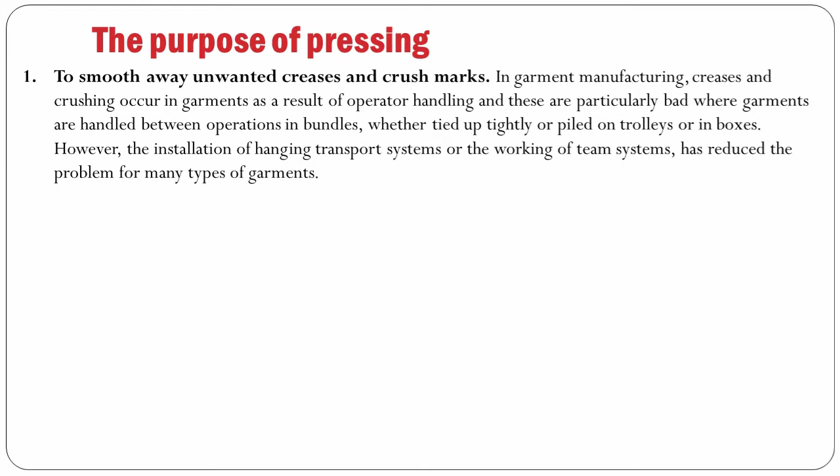The purpose of pressing: to smooth away unwanted creases and crush marks. In garment manufacturing, creases and crushing occur in garments as a result of operator handling, and these are particularly bad where garments are handled between operations in bundles, whether tied up tightly or piled on trolleys or in boxes. However, the installation of hanging transport systems or the working of team systems has reduced the problem for many types of garments.

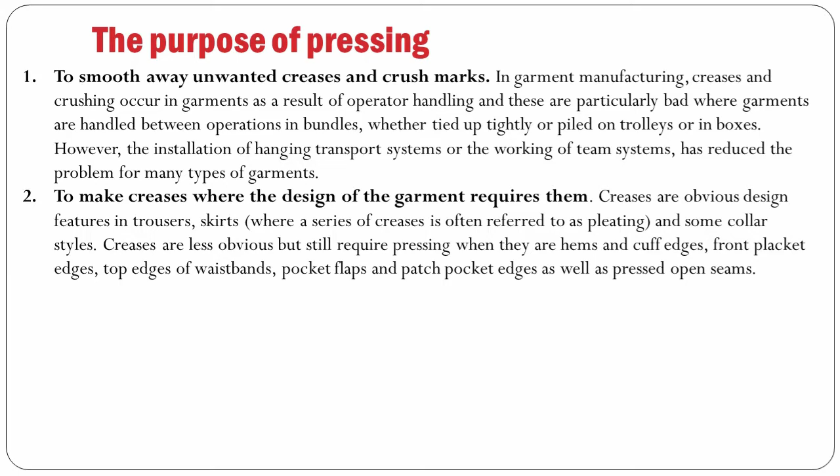To make creases where the design of the garment requires them. Creases are obvious design features in trousers, skirts, where a series of creases is often referred to as pleating, and some collar styles. Creases are less obvious but still require pressing when they are hems and cuff edges, front placket edges, top edges of waistband, pocket flaps, and patch pocket edges, as well as pressed open seams.

To mold the garment to the contour of the body. It is mainly effected in wool or wool-rich fabrics in the types of garment referred to as tailored. This sort of molding involves two kinds of deformation, together or separate, shrinking and stretching. After molding, it is not possible to unpick the seams and return garment parts to their former flat state.

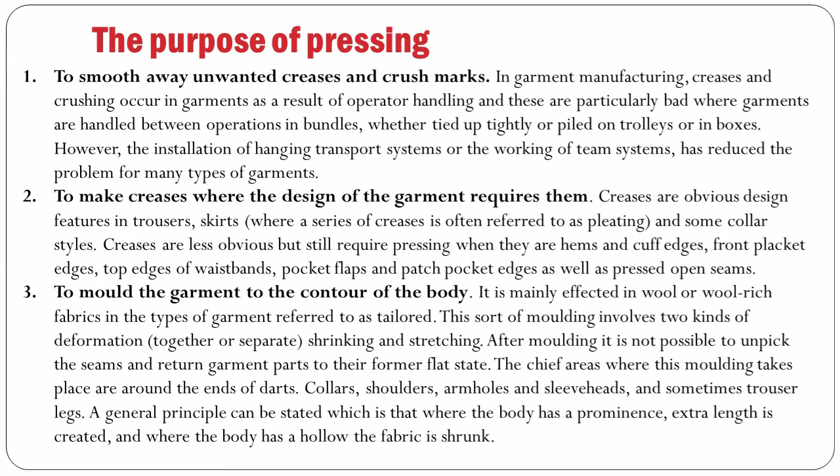The chief areas where the molding takes place are around the ends of darts, collars, shoulders, armholes, and sleeve heads, and sometimes trouser legs. A general principle can be stated, which is that where the body has a prominence, extra length is created, and where the body has a hollow, the fabric is shrunk.

To prepare garments for further sewing, the term underpressing is reserved for pressing operations on partly constructed garments, while top pressing or final pressing is used for completed garments. The stages at which a garment is underpressed will depend on many factors. It normally takes place when several sewing stages have been completed.

An obvious example would be a jacket and its lining before assembly, after which pressing of the separate sections would no longer be possible. Underpressing also makes further sewing easier to do. It may be possible to top stitch a collar which has not been pressed, but it is likely to be more quickly and accurately sewn if it is pressed.

To refinish the fabric after manufacturing the garment. Especially during underpressing, the surface of the fabric may be temporarily changed. A common symptom is gloss or glazing, induced by extreme pressure of press or iron in order to achieve a firm edge or seam. The surface fibers are heavily flattened in such a way as to form a partial mirror.

A related but lesser symptom is generalized flattening of the nap of the fabric, which no longer shows the richness intended by its designer. In summary, pressing makes the final presentation of the garment ready for sale.

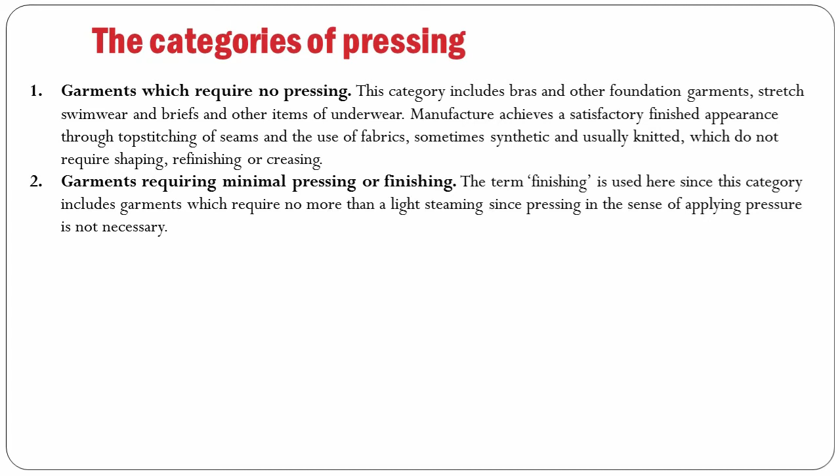Garments requiring the use of an iron in underpressing and final pressing, for the opening of seams and the creasing of edges, and for pressing garments with gathers and fullness, and in situations where style change is frequent. Pressing with an iron is common because it is simple and flexible.

Garments requiring extensive underpressing and final pressing. This category includes garments which require the pressing open of seams and the setting of edges during manufacture, which are often of more moldable fabrics, which use large areas of interlining and which are usually wholly or partly lined.

It includes men's jackets, trousers, and waistcoats, women's tailored jackets, top coats, trench coats, etc. Style change in many of these garments is infrequent and a range of specialized shape press equipment is used. Garments requiring pleating or permanent press finishing.

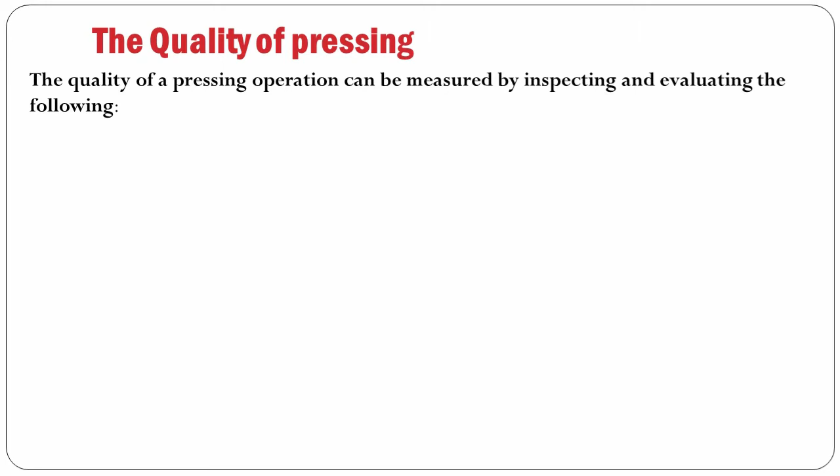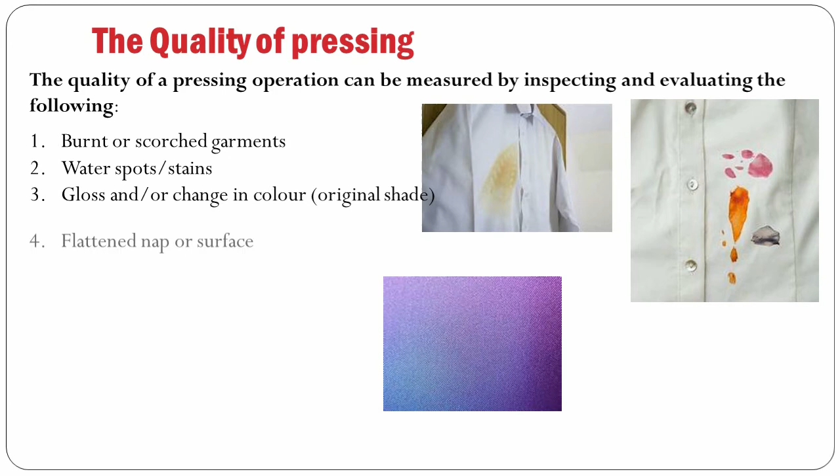The quality of pressing. The quality of a pressing operation can be measured by inspecting and evaluating the following: burnt or scorched garments, water spots or stains, gloss and or change in color from original shade, flattened nap or surface, broken zippers, buttons, etc.

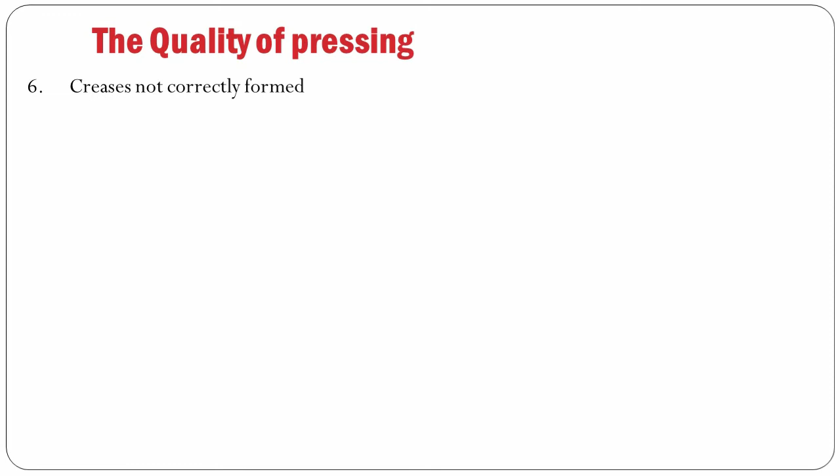Creases not correctly formed, fabric of finished garment not smooth, wrinkle free and showing its proper appearance, edges wavy and stretched or thick, garments not thoroughly dried, pockets not smooth, lining showing pleats, creases, shine, garments not correctly molded either in detail or total silhouette, shrinkage due to heat and moisture.

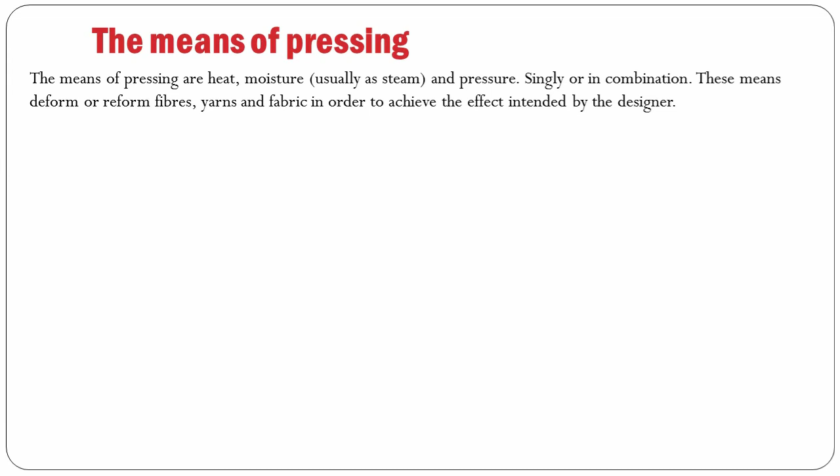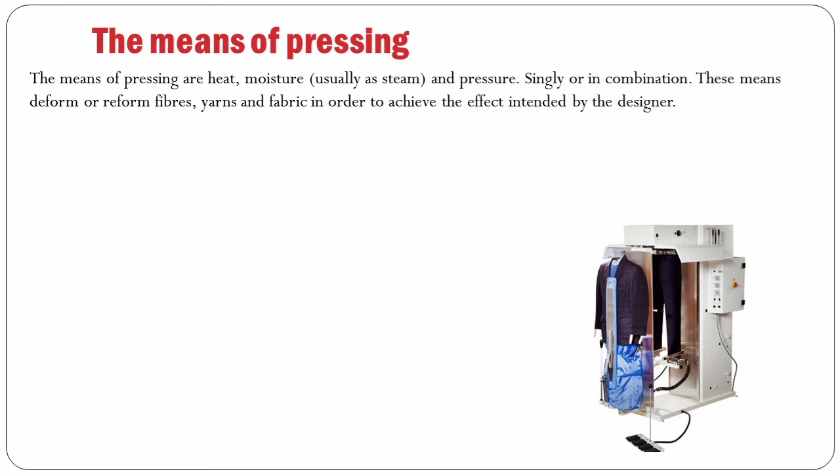The means of pressing. The means of pressing are heat, moisture, usually as steam, and pressure, singly or in combination. These means deform or reform fibers, yarns and fabric in order to achieve the effect intended by the designer.

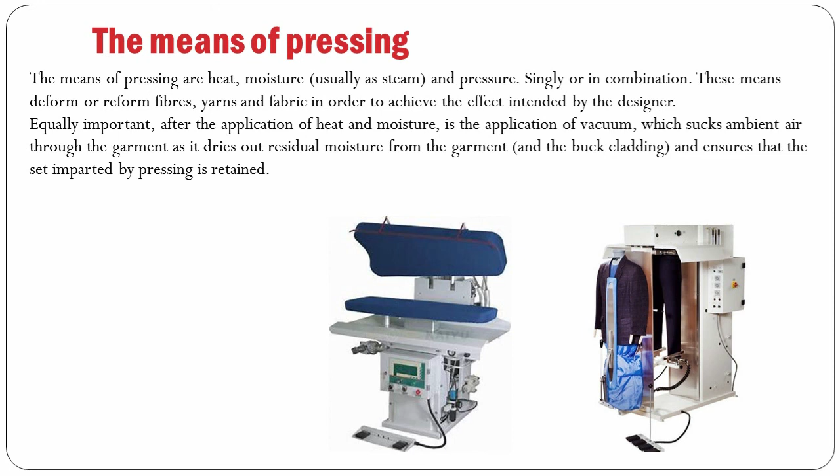Equally important, after the application of heat and moisture, is the application of vacuum, which sucks ambient air through the garment as it dries out residual moisture from the garment and the buck cladding, and ensures that the set imparted by pressing is retained. Knitwear is normally finished flat to the correct dimension by inserting a wire frame into the garment before the application of steam and vacuum.